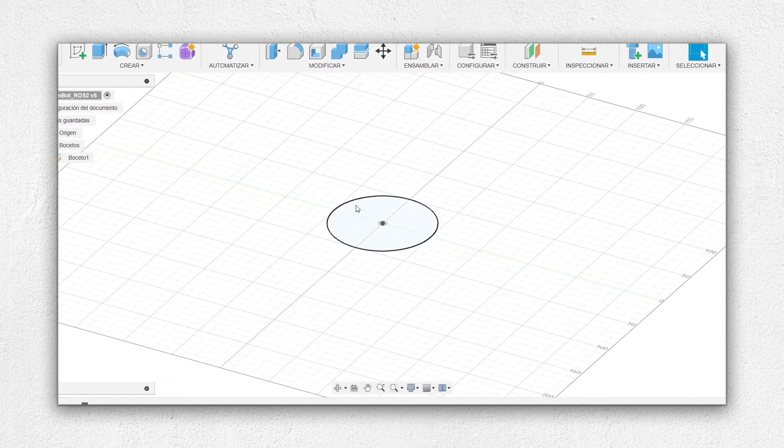Hi and welcome to this new video where I'm going to show you how to go from nothing to create a simple robot arm and give it some materials, give it some joints, and export it to ROS2 so that we have a package that we can use in Rviz and Gazebo. So let's get started.

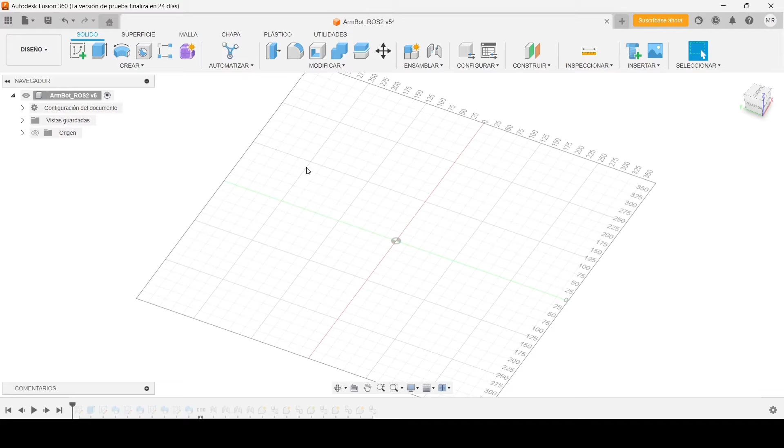I've already done it, but I'm going to go step by step showing you how you can do it. This is not a tutorial on Fusion360, but at least you have some starting point on how to do it for yourself. The first thing is you have to create a drawing, and it works like SolidWorks or Onshape.

And this is quite simple. Just pick the plane that you want, then select create a draft, and select the plane that you want to draw on top of. And then you have the tools to select and draw whatever you want.

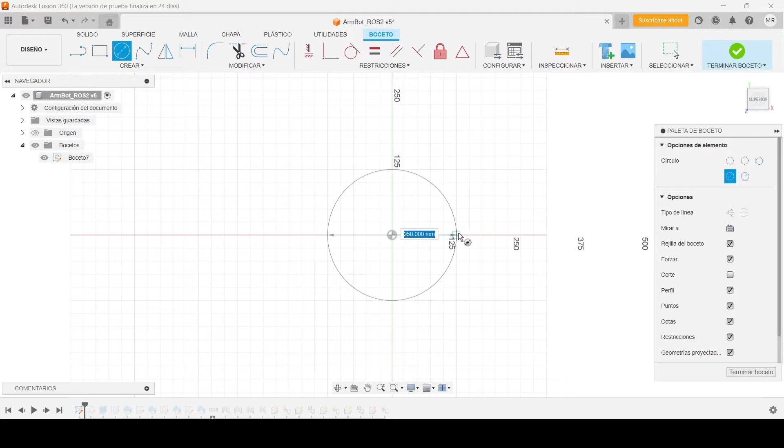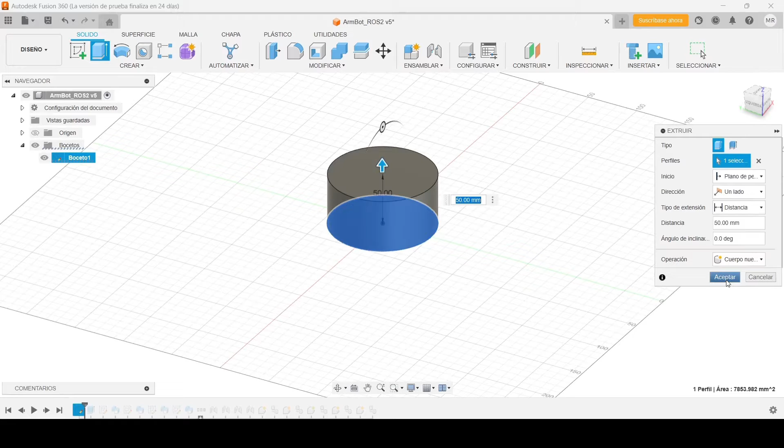In this case, we're going to draw a circle. Once you have the draft, which you should have something like this, like a circle, now what we're going to do is extrude it. In this case, we're going to do just a cylinder. So it's really simple. Just go to extrude, select the face, in this case here, and extrude like that. Boom, that's it. Accept, and you will have a part that looks like this. There you go. Very simple.

Now, what we want to do is a 90-degree turn and a very special shape like this one, okay? We want this shape. How can we do that shape?

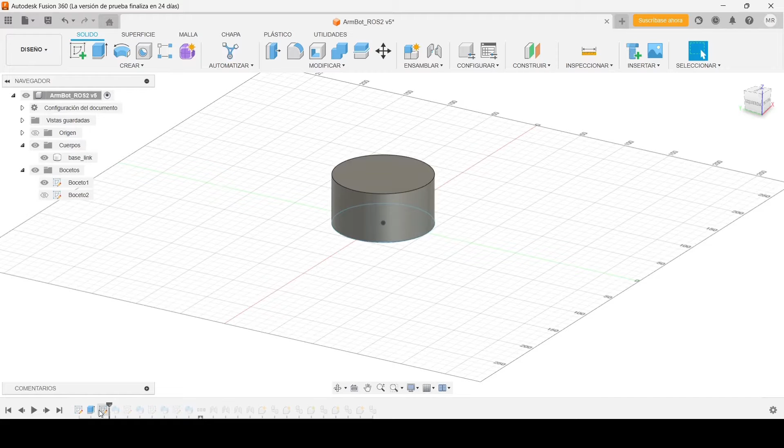The only thing that we have to do is draw, you can see, a curve. We draw a curve that we drew just by doing a sketch on this plane. If we press here, let me just do that, and this plane, and with that we can draw this line, and you can draw them just by the following.

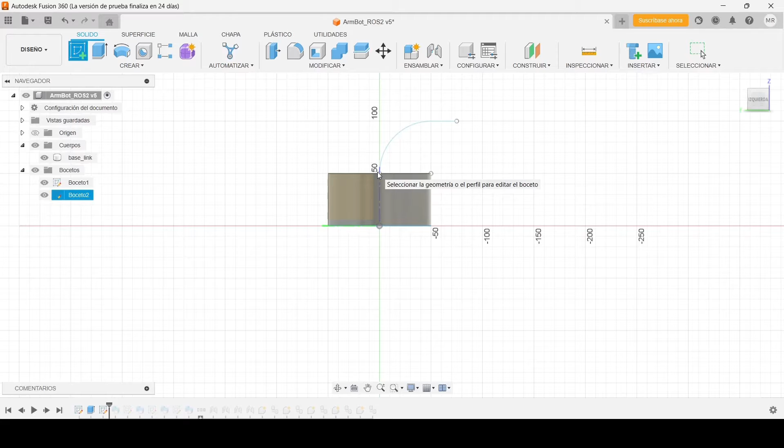Let me show you another example. Let me draw a line. I would draw this line, then this line, and something like that. Okay, that's it, and then accept.

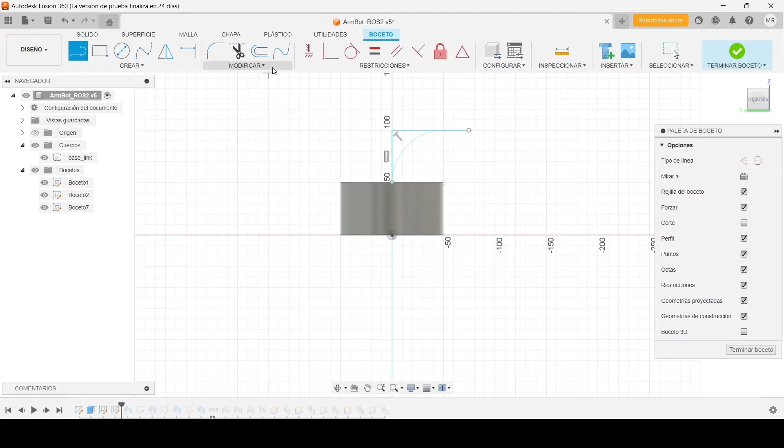Once you have it, then we click on this and we select the lines holding shift, and we can move it until it gets that exact line. Okay, very simple. So how is this done?

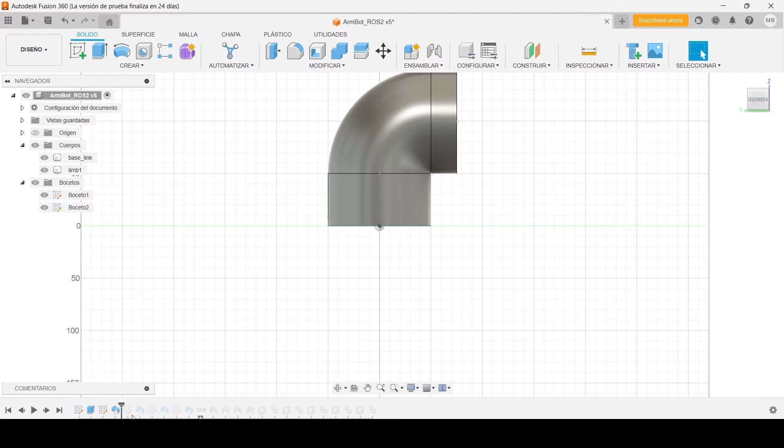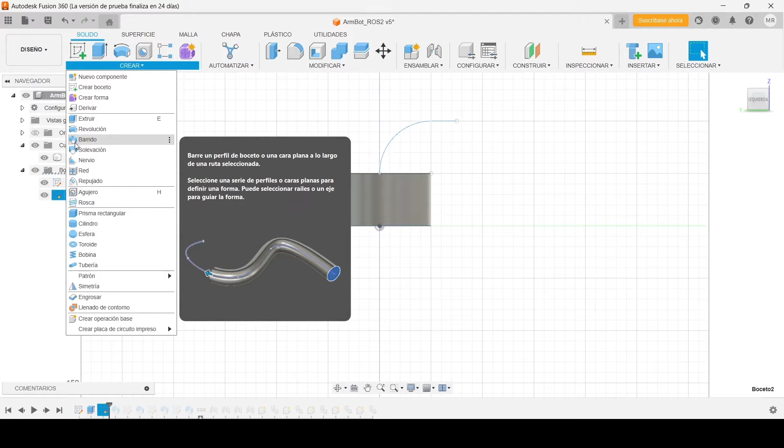Once you have that draft, which is this line here, let me just go here. Okay, we have this line. The only thing that you have to do is go to create, and there's one option that says, in this case, 'barrido' in Spanish, but it's this drawing of a blue shape that follows a line essentially. So you go here, you select the shape and the line. In this case the shape is the face, the top face of the other element that we just did. And then we select the line, in this case, this line. That's it. And that's how we have been building the rest of the arm.

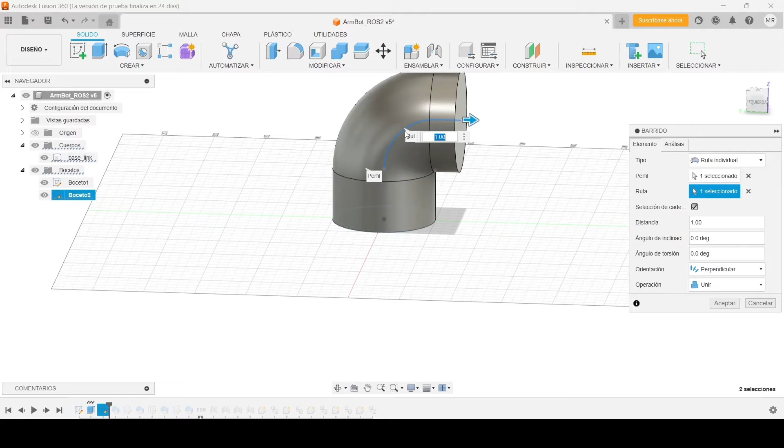So you can see that we generated this line and we do this same exact thing with another line here, and then we do the exact same thing with another draft with, you guessed it, another line, and we do another shape, another line, and finally this shape. That's it. That's what we did.

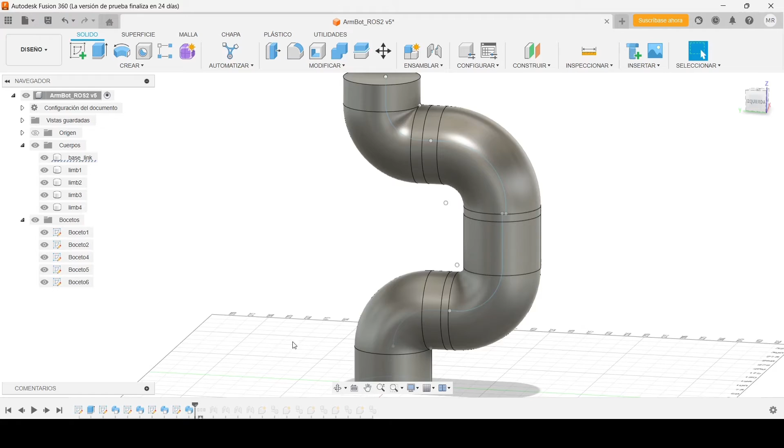And now at the end you should have 4 bodies with different names. And it's very important, this is important, that when you create the model, let me show you here. Let's go, for example, this last one, okay? When we go here and we create the part, it's absolutely essential that you do the following.

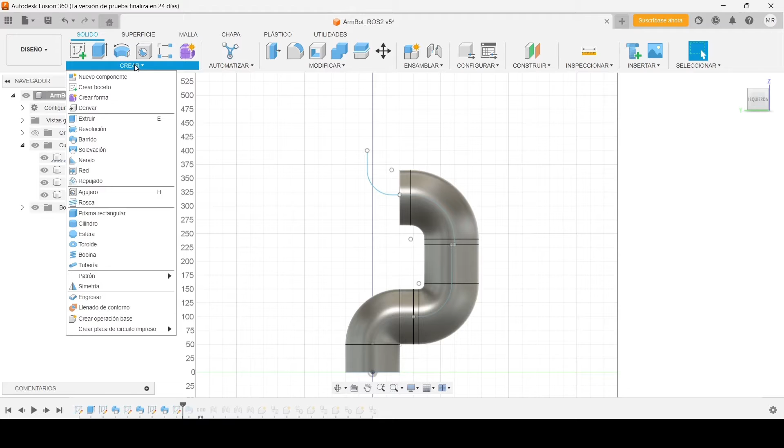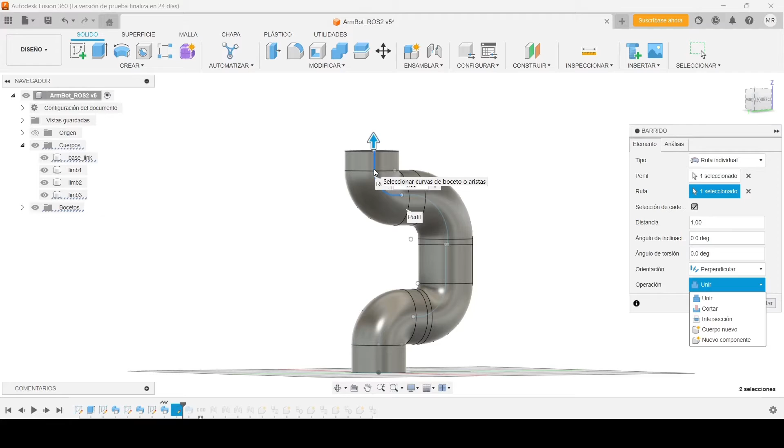So if you select this one and we select this face here, and then we select the path that has to be followed, okay, it's absolutely essential that you don't select join as operation - you have to select new body. Okay, new body. It's this shape like a cylinder with a star here. If you don't do that, it will generate a single monolithic element body that we don't want. We want different bodies. Okay, that's how we should do it.

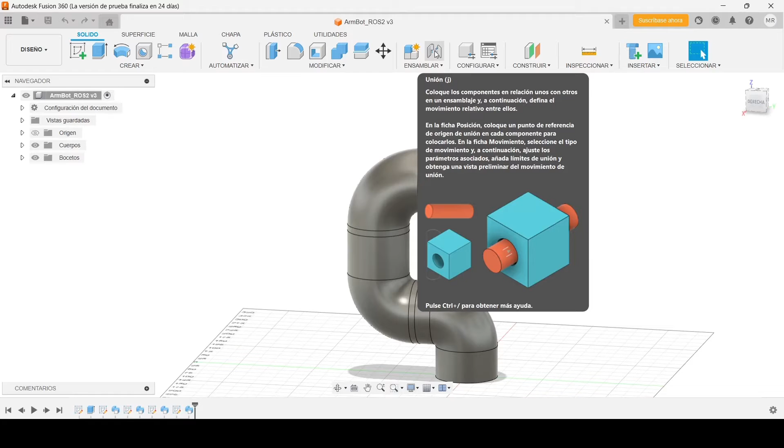At the end, you should have something similar to this. Okay, all right. So now that we have our model done, the first thing that we need in order to be able to convert this to a URDF is something very simple, which is we need to create an assembly, which means that each of these parts has to be a separate element and has to be connected to the others through joints. For that, there's this fantastic element which is called union joints.

And it says that we need to have components. We have to convert all our bodies that we generated in the previous step into components. That's very simple because the only thing that we have to do is click on the bodies folder and click on create components from bodies. And there we have it. Now we have all these bodies that were before - now we have them as components.

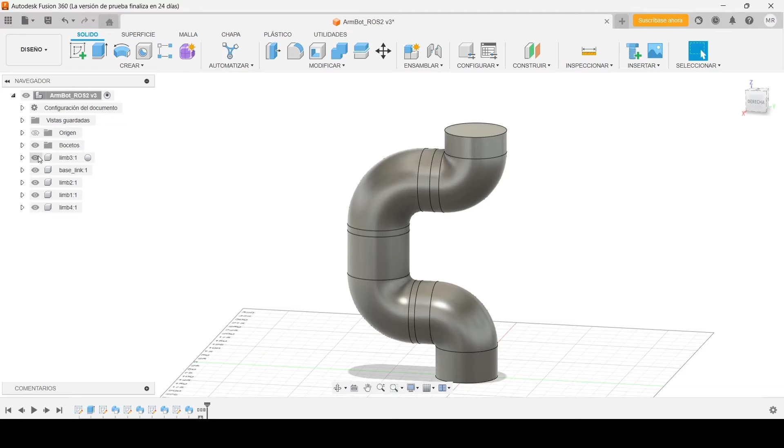This way, we are able now to use the joint functionality. Before doing that, let's add some colors so that it's easier for us to know when one element, when one component starts, the other one ends. For that, what we have to do is select the body and in the body, select the aspect.

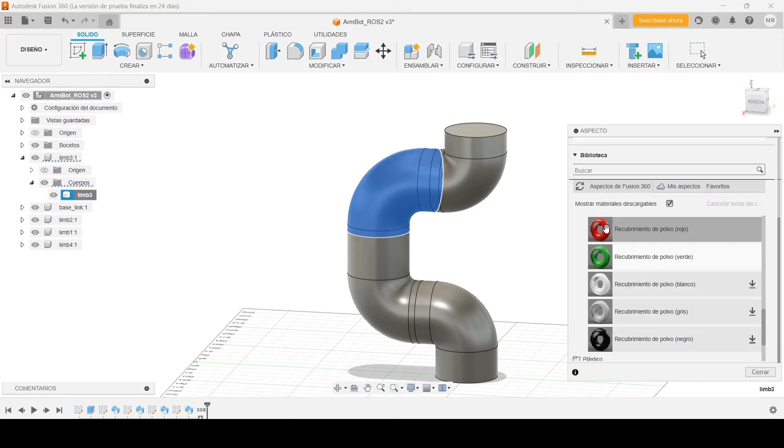In this case, we are going to select paint and smooth. You can download any of these materials. I'm just going to select them like that. So red for the first one, green for this second element, then blue for this third one, then yellow for this fourth one, and a white one, let's do it white like that. We can download it and then click on here. Perfect. We can close it and save.

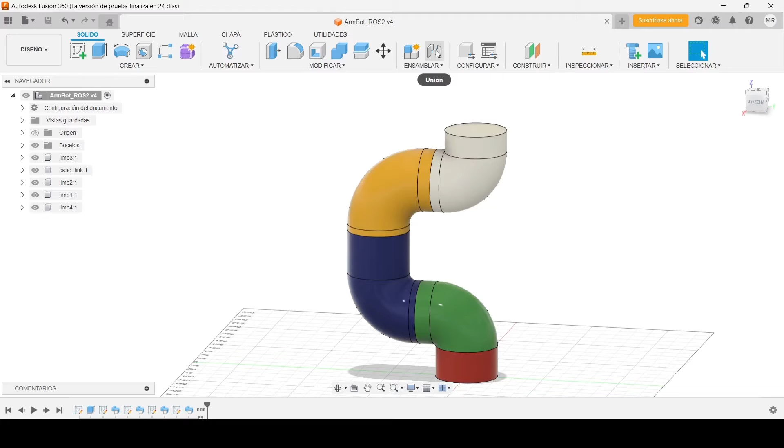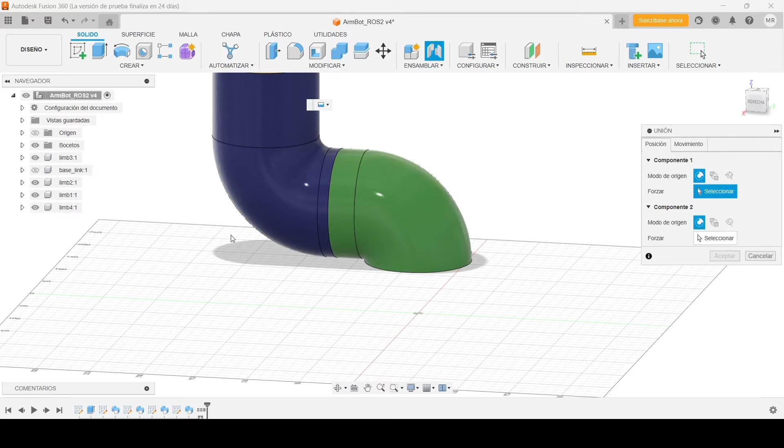To create the joints, we have to select this joint element, and here we always select first the child and after the parent link or element in this case. For that, what I like to do is hide this base link, and then we are able to select the center like that. There we go. And now we put it back again and get the limb one, hide it, and we select the center. That's it.

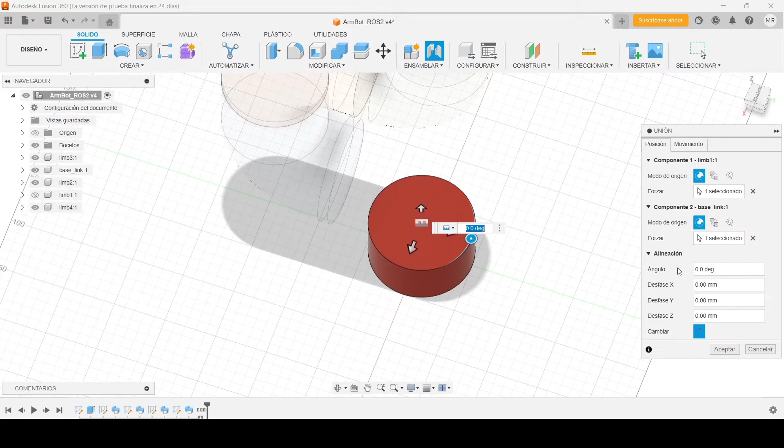Now we have to select the movement. Let's visualize the limb one and the kind of movement. In this case, we're going to select revolution. Perfect, it's revolving around the axis that we wanted. We click on accept. And you should see here in unions, there's a revolution here.

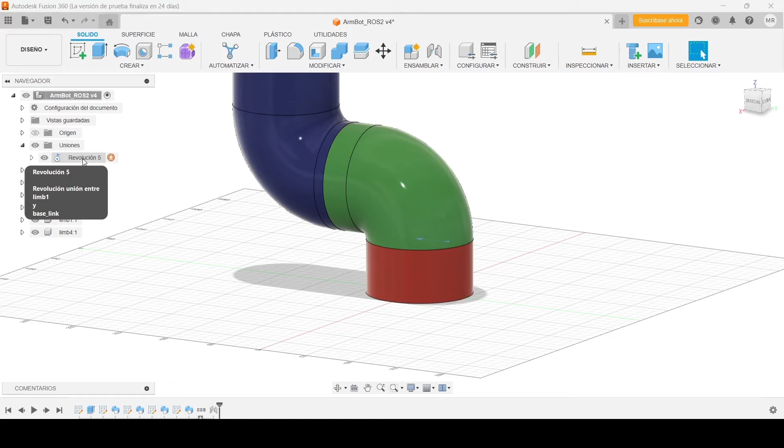We're going to rename it to base link, limb 1, or better, limb 1 to base link. There we go, limb 1 to base link. And we're going to say always the child and the parent. That way, when we convert it to URDF Xacro, it will be very clear which joint it is. Otherwise, it's a bit more confusing.

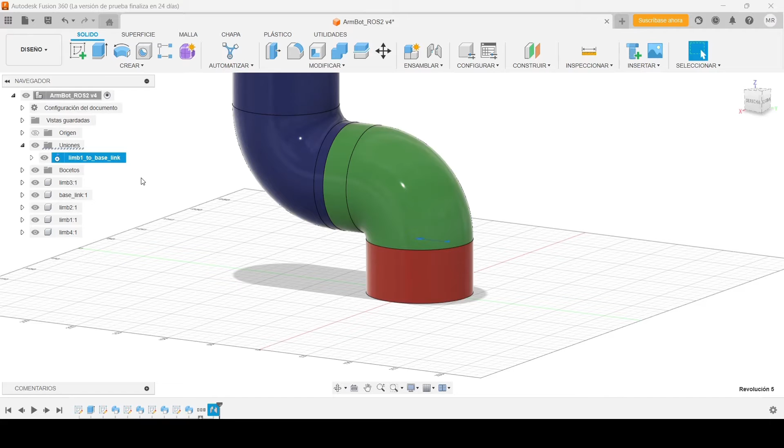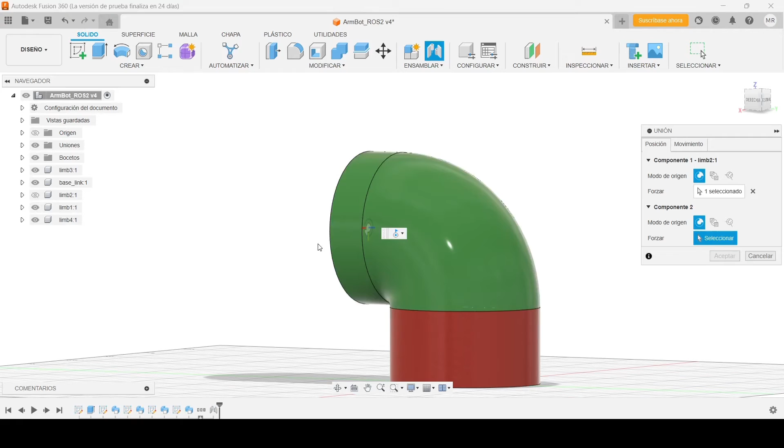Let's do the same thing for the others. We go in here and select limb 1 like that, we hide it. Then we select the child, in this case limb 2, and limb 1. Again, we select this, put it like that, and check that it's revolving around the axis that it should. In this case, perfect.

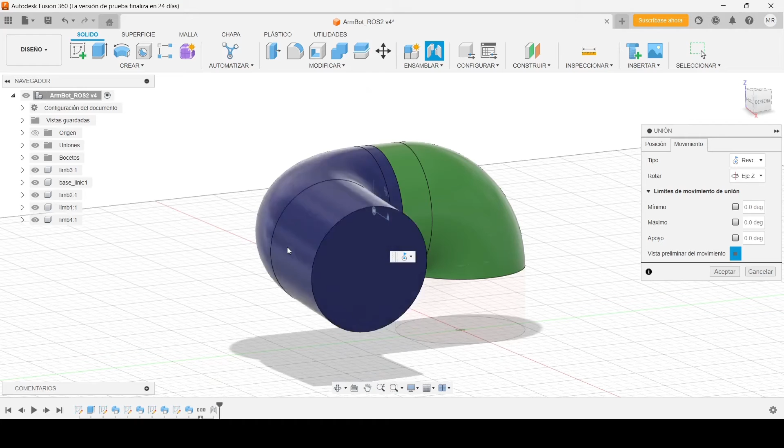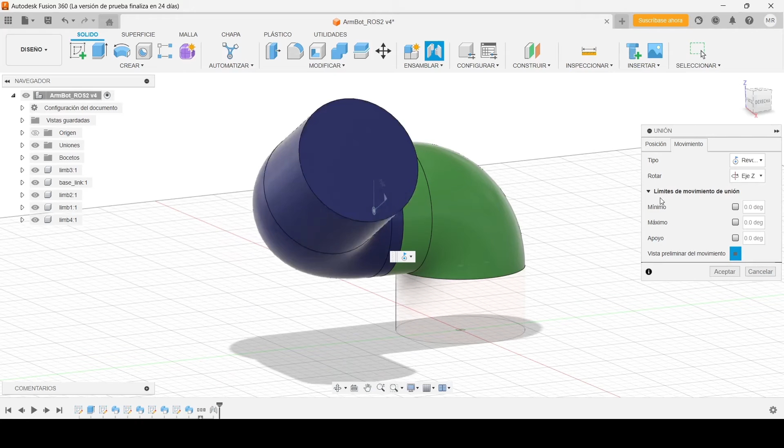We're not going to put limits because we don't need them, actually. Afterward, when we do the conversion to the Xacro and use it in Gazebo, we'll set the limits in the control system. So it's not a big deal, and that way we have freedom for now. But you could select the limits of movement in case your robot has those limits.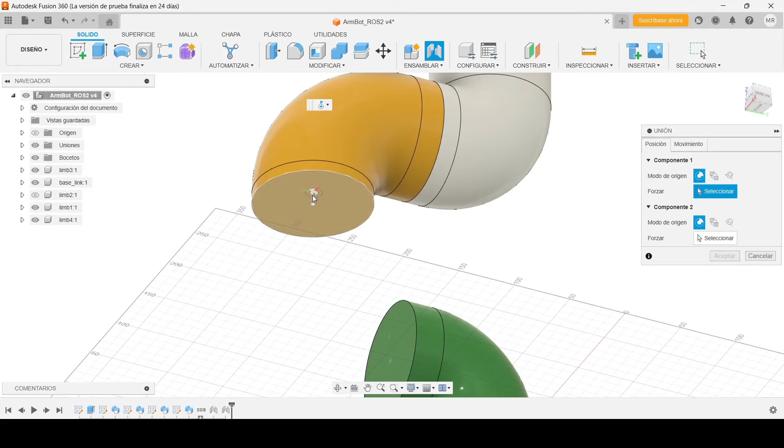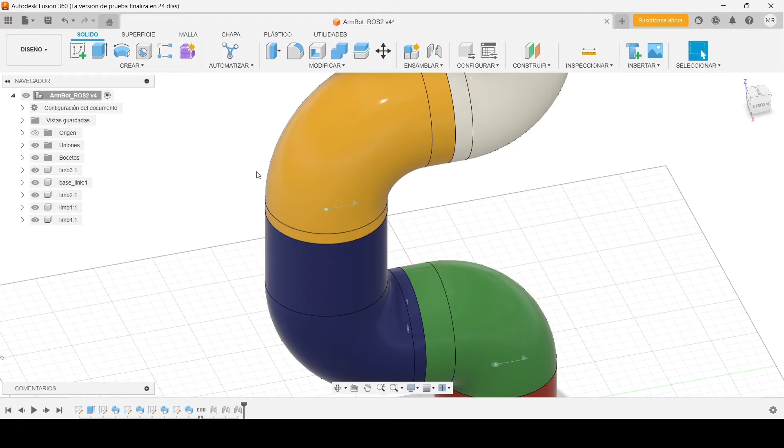There we go. Now let's rename this one again, limb 2 to limb 1. And again, let's hide limb 2, go to joints, select the center, and now limb 3 - we hide it and unhide limb 2, and select this. Now let's see the movement, how it works. There we go, fantastic. We accept and rename it, limb 3 to limb 2.

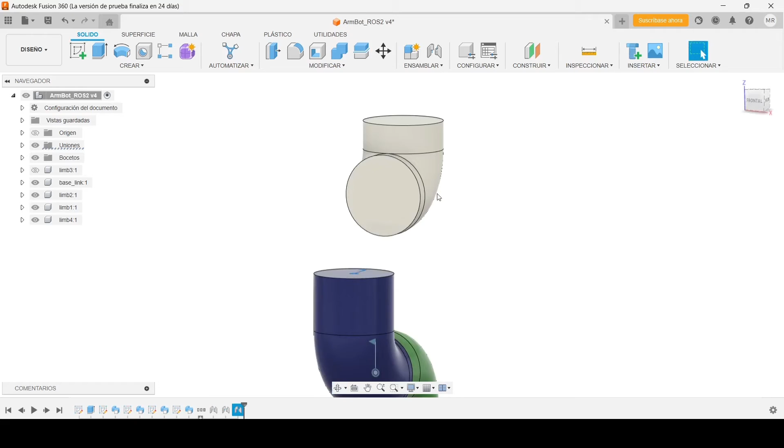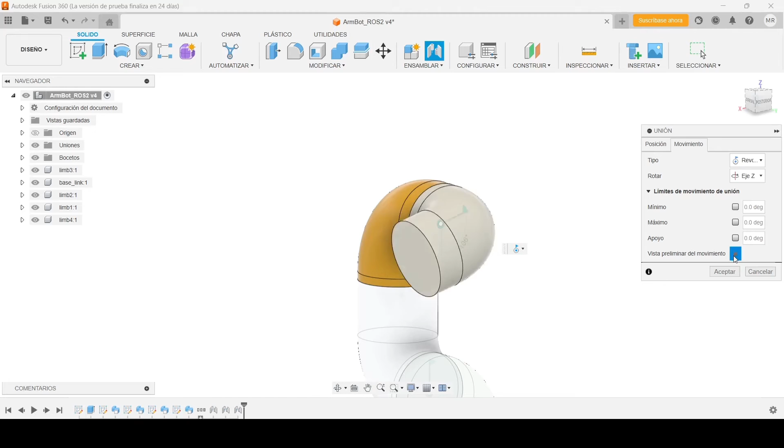There we go, and finally we select this guy here. Let's have a look, limb 3. We hide it and do union, select this center, and now limb 3, limb 4, and we select this guy here. We see the movement, we hide this, check, fantastic, marvelous. There we go, and finally we rename it, limb 4 to limb 3. And there you have it.

Now we have all the joints necessary for our robot. In your case, it will be totally different, but this is how you set joints in Fusion360 so that this works. Let's save. The next step is importing the plugin that makes all the magic happen.

For that, you have to go to this website. You have two options, depending on if you use ROS1 or ROS2 - they are basically the same. I will use the ROS2 version, and for that, you just have to download it like a zip file and unzip it. If you unzip it, you'll get something similar to this. So you have this Fusion2 URDF. In this case, this one's the one, ROS2. And there's this folder that has this script, and this script is the one that makes everything happen.

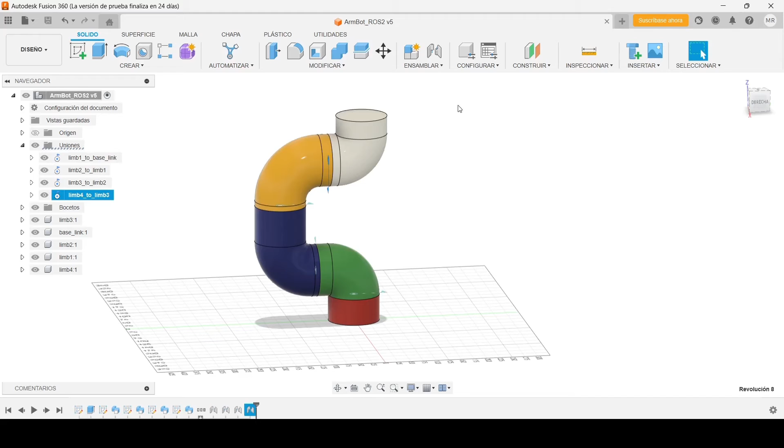How can we make Fusion360 have this plugin? There's various methods, but the method that worked for me was to copy this folder, the URDF exporter ROS2 folder, to the path where you have installed Fusion360. In my case, it was this path that I have here, which is AppData Roaming Autodesk Fusion360 API. And inside that one, there's a folder called scripts - you can see here, scripts. And here I just copy-pasted the folder that has the script that will make the magic happen. If you do that, then when you close Fusion360 and open it again, you can go to utilities, and in complements, it should appear: URDF exporter ROS2.

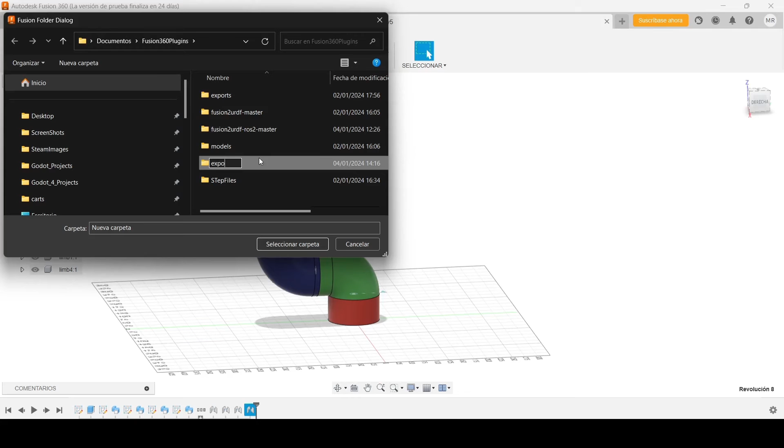That's it. So how does this work? Just click on it and run it, execute. It will ask you where you want to export. In this case, we're going to create a new folder called exports ROS2, and we select that folder. And that's it. It should have successfully generated a file.

Let's have a look. If we go here to exports ROS2, we have this new folder called ArmBot ROS2 description, and inside it we have a URDF. If we open it with code, we can see that it has added all the links, all the joints, and in this case they are continuous. That's what I told you, we are considering these joints continuous, but if you set some limits, then it will be revolute. In this case, it's more than enough like that.

And that's it. That's how you have the ROS2 URDF files generated from Fusion.

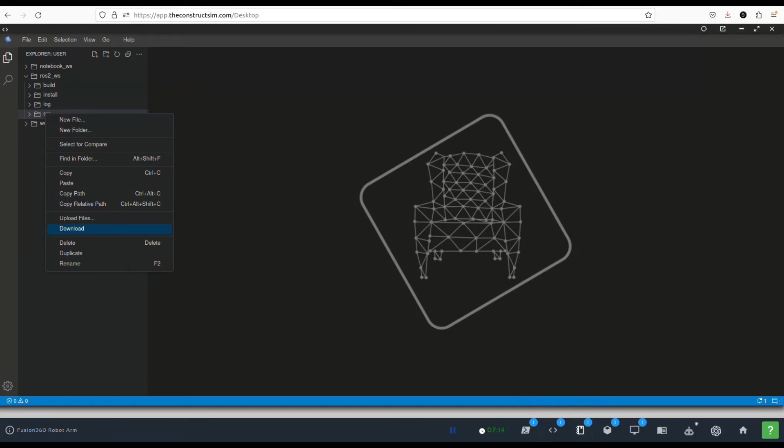So now what we have to do is just one step: go to our ROS2 workspace in our local computer, or in this case, I'm showing you this in a project in the construct. It will be exactly the same in your local computer. You have in the video description the link to this same project where you have everything solved and plug and play with a notebook explaining all the steps we've been doing till now. The thing that you have to do is go to our ROS2 workspace and upload our file. In this case, I've already done it.

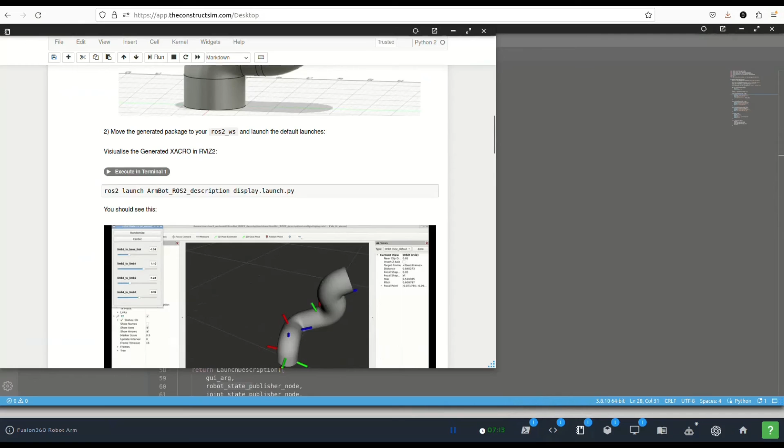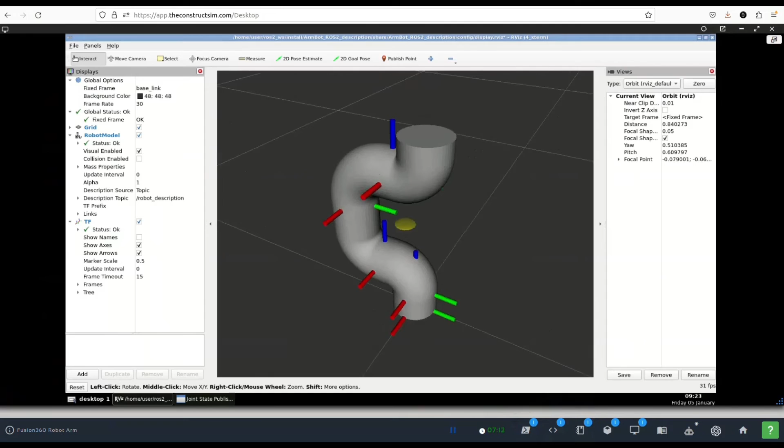So let's have a look. This is the command. We open a terminal, doesn't really matter which one. Obviously you'll have to compile your ROS2 workspace using a colcon build. We won't go into details there. And here you have it. So we have our model that was generated in Fusion360 and with the joints that we defined. There you go, working perfectly.

So this means that you will be able to use this model for visualizing the state of the robot. If you have this robot physically and publishing joint states in ROS2, you'll be able to visualize exactly the configuration of your robot through Rviz.

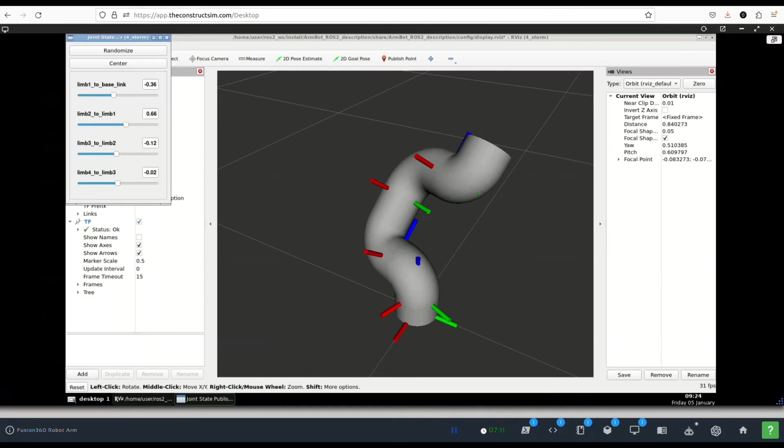That's one thing. Then the other thing is Gazebo. So we can have a look how it's working in Gazebo. It's a very good starting point to have a simulation, at least the basics working.

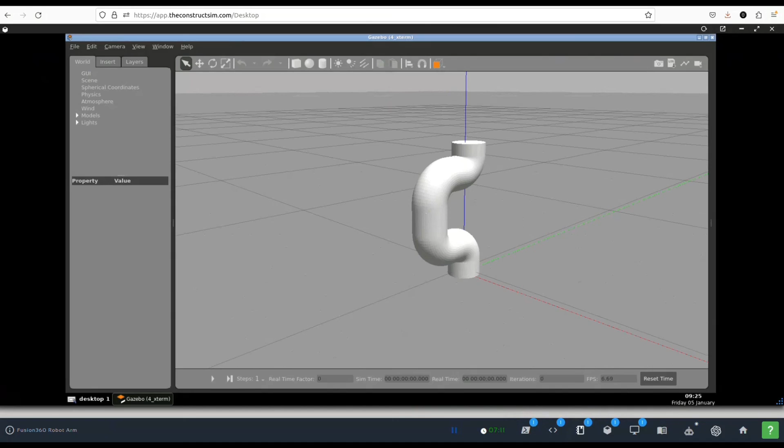There you go, so we have our arm. It doesn't have control or any means of being able to use it in any way. You can see that the inertias are correctly calculated, which is a pain, especially with very complex shapes you normally have to simplify in some way. In this case, we have them already done for you. And also collisions, which are basically using the meshes that were generated. In this case, we can see here in meshes that they were generated through STLs.

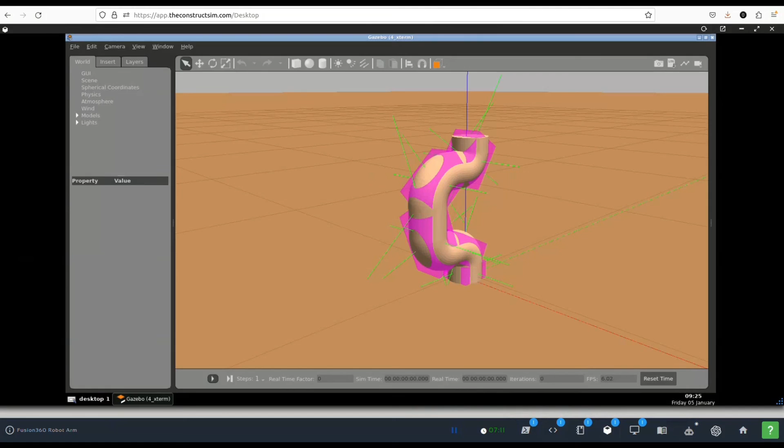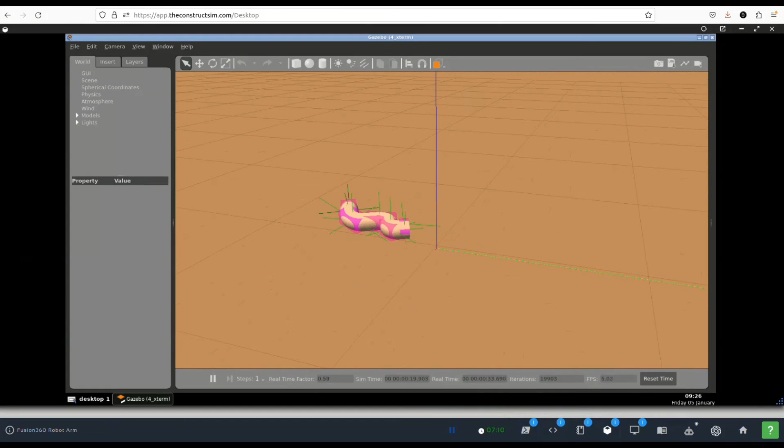And if we hit play, we can see that our robot is just limp. It has some joints, but it doesn't have any control. It's not joined to the world, which with robot arms is very important, that we place it fixed in the world so that it doesn't move around like this. Basically it falls, but it works perfectly. So things that we need to do now: we would need to add the controls, put it fixed in the world so it doesn't fall, and also give it some colors as we did in the Fusion360 model, but that's for another video.